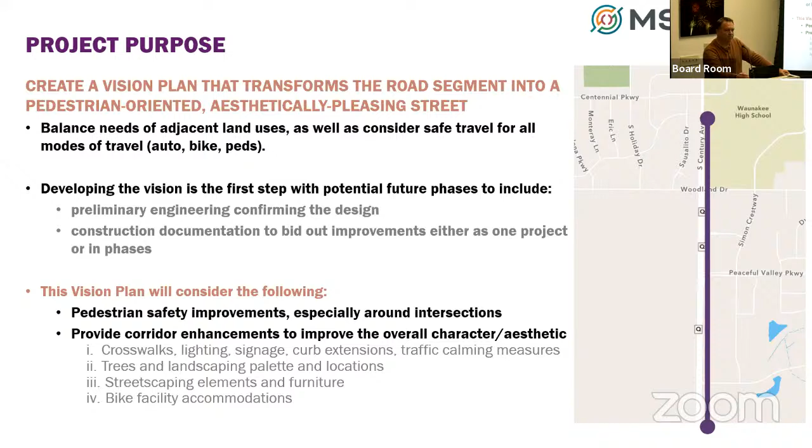I think it was already noted that we had discussions with staff. We've talked to landowners. A lot of comments were seeing a need for some improvements, especially with safety. There were questions about how you pay for it, and this was built before, but most agreed that some improvements are desperately needed in this corridor.

Traffic counts we just recently completed last Thursday. We're doing some calculations to determine the traffic counts. There are four segments we did, basically between each of the main streets all the way up to Centennial. So this week we'll have that information.

So tonight is about some of the ideas presented to landowners and staff, for direction on any modifications, or big no-nos if you see anything, to bring to the public. So the intent is to pick a date in early December to bring this as an open house to the public, and then come back here again for Plan Commission in January, and then ultimately to the board.

So there are four big ideas. I did provide some information in the packet. We'll go into a little more detail through this presentation, but: safer intersection crossings, increased comfortability for pedestrians and bikers, improved pedestrian connectivity, and beautification.

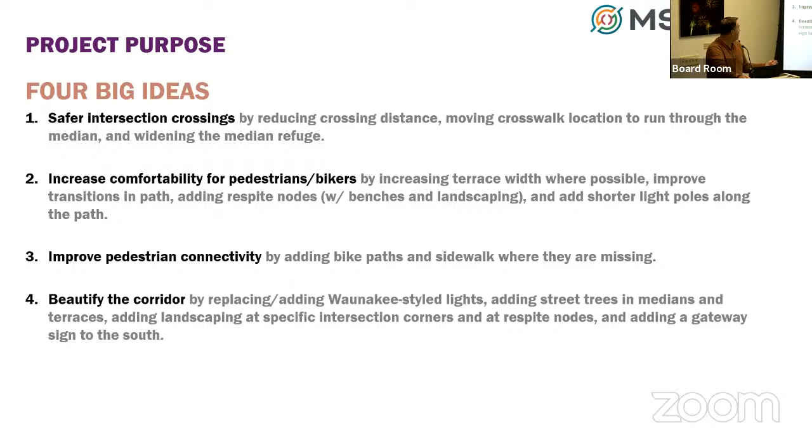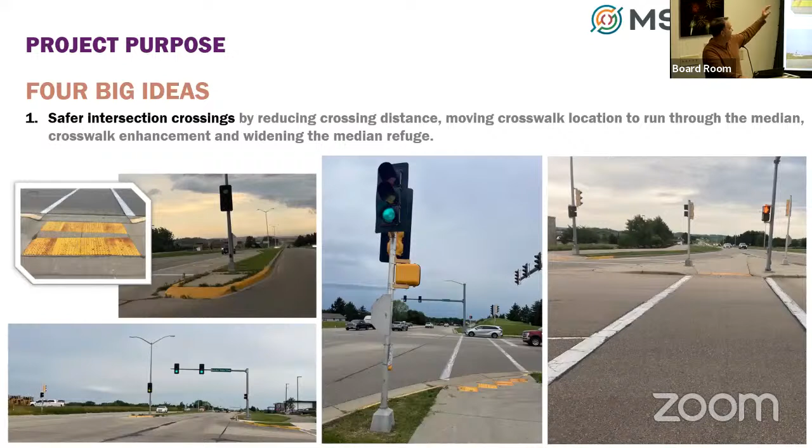These are examples. So I'm going to go from existing to big idea changes.

Yep. Yeah, your mic, Sue. Did you say the upper right-hand corner was East Washington? Correct. It'd be much easier if you could add the street corners if it's Madison, Waunakee on all these pictures, because I was really confused when I was looking at this. Okay, understood.

And we'll go section by section after the big ideas for the Waunakee vision. So these are images, not of Waunakee, but of opportunities for how we can improve it.

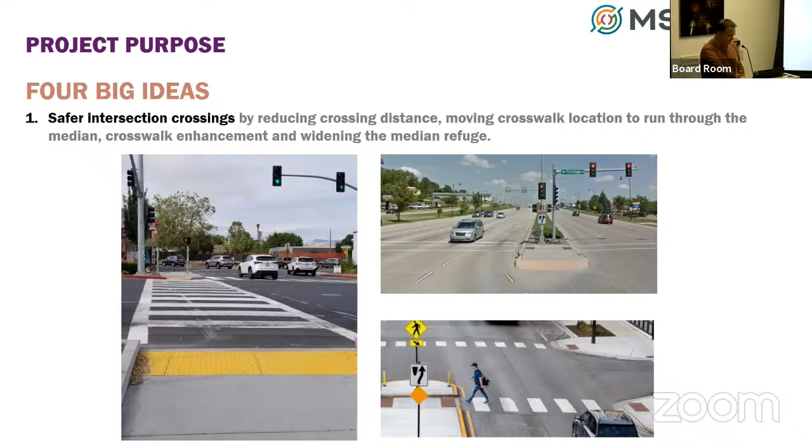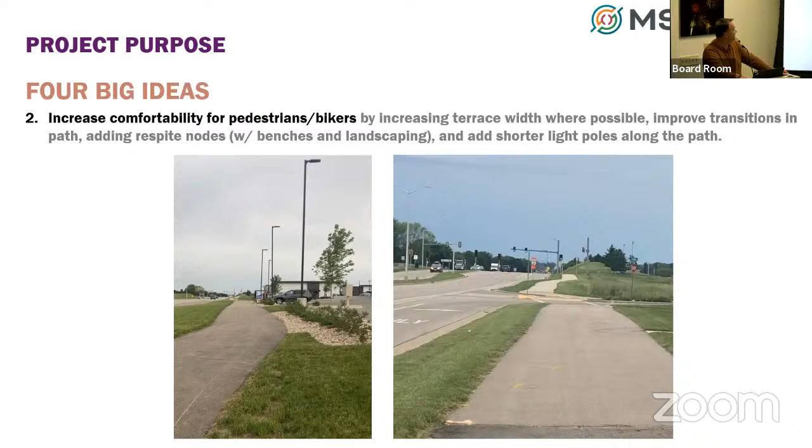See, these are Waunakee, that's Sarah Lane on the right there. Again, increasing comfortability for pedestrians and bikers. Right now there's minimal terrace, we call it, between the path and the curb in most cases, and there's definitely no places to stop, respite, benches, anything of that nature. So part of that discussion will be these images of what could be.

Looking at street lighting, there is no current lighting. If you go through there right now after this meeting, you'll see how dark it is beyond a little portion for the road where the median has lighting. There's no lights for the paths, and there are many schools here with people walking through, through fall, winter, and spring. So one of the considerations was to add lighting at a lower level along the bike path sections.

Then there's an option of a few locations that maybe benches and some additional landscaping might be nice, potentially a map in one location. The example here on the right is between Sarah Lane and Woodland. Currently, where the green is, that is where the path is—it was built closer to the road with very little terrace. What we're proposing, when that site redevelops, is considering moving that path basically 1 foot off of the right-of-way line to gain that additional comfort zone and terrace area that doesn't exist now.

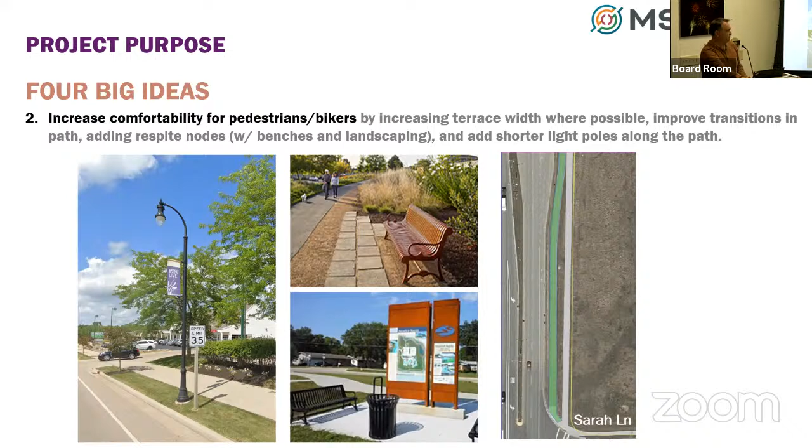Pedestrian connectivity—there are gaps in the corridor, notably between Centennial and Woodland on the west side. There is no path. There is the school path on the east side, but no path or sidewalk on the west side. Also currently, but planned for, is no path on the west side from Woodland down to Peaceful Valley. This would propose to have that path connect from Peaceful Valley all the way up to Centennial on that west side.

On the east side, we talked on the previous slide about the idea of changing where that location is between Sarah Lane and Woodland Drive to put it closer to the property line. But also, if we are going away from bike lanes on the road, it was even discussed with one of the developers that we should make it as safe and easy to maneuver for families on the bike path. So where number 2 is, where there is a hill, if you cut into it a little bit, you can more directly have that path connect from the intersection in the northeast corner over to the school path. Because otherwise you have to go across, do a direct right, and then do a direct left.

Notably in Peaceful Valley, there is no sidewalk or path on the south side, where the number 4 is. So there is an opportunity to go down to 1 lane in that portion. It already does go as you go east, it just doesn't start as a 1 lane. If you make that a 1 lane, you could have a decent terrace and still have a sidewalk there that doesn't exist now.

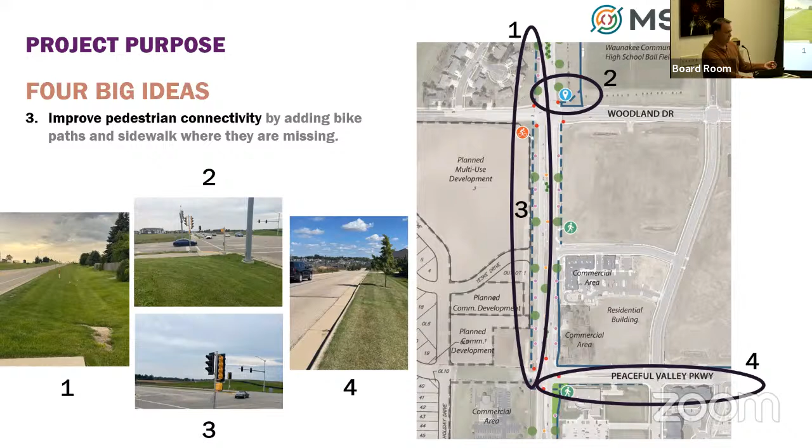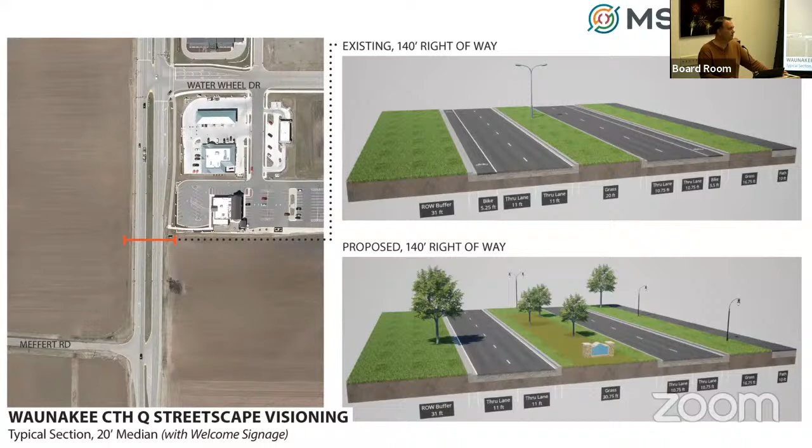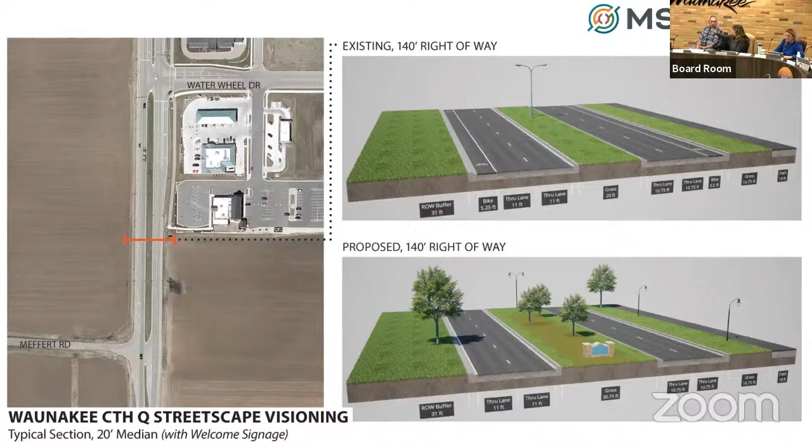Thank you. So is that median new? Are you proposing to put a whole new median in? I mean, the road was constructed... I don't understand what you're asking. Sorry, I was asking if the median strip is already there. This is all Waunakee, existing. Yeah, it is existing. So this doesn't change any of the existing access issues for the church and people on the other side? It does not.

And you're saying $400,000 to $500,000 for this whole project all the way to Centennial? For the median specific item. I think we probably want the whole cost. Yeah, the whole thing. And I'm kind of assuming based on Robert's comments that he would apply TIF to some of this, which he'd have to get support for, but there might be increment.

I like some of it, but I'd be very concerned about doing too much landscaping that obscures people's views, and about the cost of it. Bill will have to weigh in on that at some time.

Madison did these beautiful median strips up East Washington Avenue, and at the time I said, are you going to be able to afford to maintain them? Now they're concreting them over, or doing something totally different, all over the city, because they can't afford it. So I think we have to be careful where we put this, even though I love it and it's beautiful, I know it's infeasible to maintain over time. Trees are great, those are easier, but we should be careful.

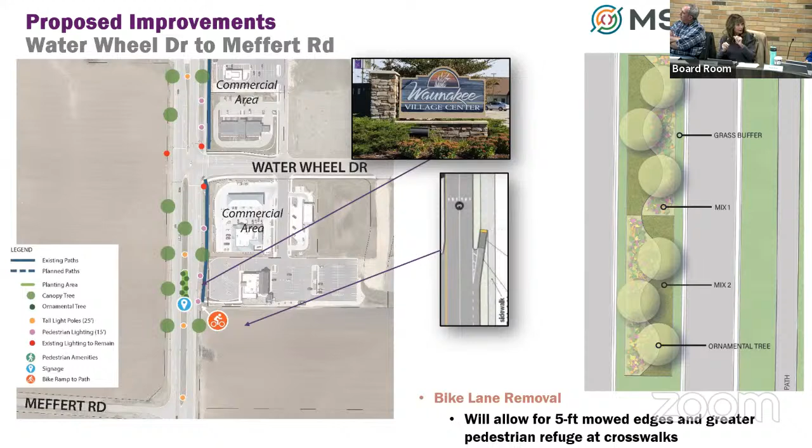The pedestrian stuff is really important. At certain intersections, marking crosswalks works well. I love the pedestrian flashing lights at certain spots, those work really well. I'd be concerned about going too far out into intersections because of snow and people being able to get around the corners. I've seen what Madison's done in some places, and I can't wait to see how they remove snow from there. I see cars going over the curbs, so you don't want to go out too far. It seems pretty reasonable, but I can't really tell for sure. There's a lot to study and a lot of input needed. I don't know how much pedestrian traffic we get in that area anyway.

When I look at what the uses are, I don't know, people walking along highways, and it is a highway. It will always be a highway. I think we have to recognize that.

I like the idea of improving the look going into Waunakee, but I was more concerned about Woodland into downtown, because I think that's so unattractive. I would love to see trees all the way down to Main Street and that looking more like our downtown. This area, I think, doesn't look bad.

So just some general, there's lots of comments to be made. And this is really the first we've looked at it. So, I mean, I think there's some viable things, but some other things to be considered. All right, thank you, Sue.

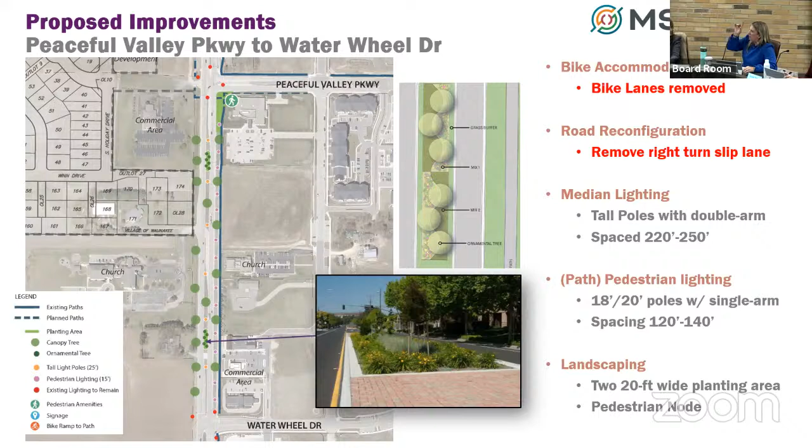Tricia? A couple things back to - sorry about that - turning this would be off of Centennial, making that a right turn only into the school at that intersection, on Centennial. The concern I have about doing that is that it just pushes more of the southbound traffic into other areas that are already very congested during school hours. So I don't know if maybe there's something to think about with that is where does that traffic go that otherwise would have come down from the south and gone into the school for drop off or pick up at that direction.

I don't hate the medians the way they are now. I see where it's going, but I think that improvement could be phased over time, or you know, some of the aesthetic improvements to what is existing right now.

And I think really increasing - I'd agree with you on whether it's the flashing lights and the white pavement - really at those three main intersections, would be Water Wheel, Peaceful Valley and Woodland. And then the bike, walking, pedestrian paths along both sides, taking traffic to those main intersections and just making those key crossing areas. On both sides, it already exists pretty much on the east side. And as it's developed, having something so that way you've got an option depending on where you're coming from or where you're heading.

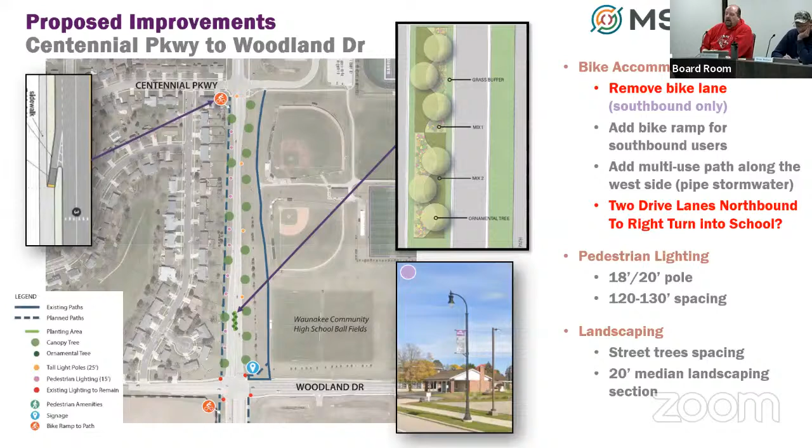Woodland and Peaceful Valley Parkway are kind of the two that I have the most concerns about. I would love to see the additional painting wherever it doesn't already exist - I think that's a really, really easy thing to take care of. I'm not sure about reworking some of those intersections. That right turn at Peaceful Valley Parkway, there's part of me that says yeah, there's probably some good value there, but again, I need to know what the cost of doing something like that is.

I guess that's kind of the end of my rambling. I'm not against this overall. I think as far as what you take to the public, take it all. There's nothing in here that strikes me as, yeah, that's off the table right from the start. All right, Brian.

Again, I would echo a lot of what Joe said.

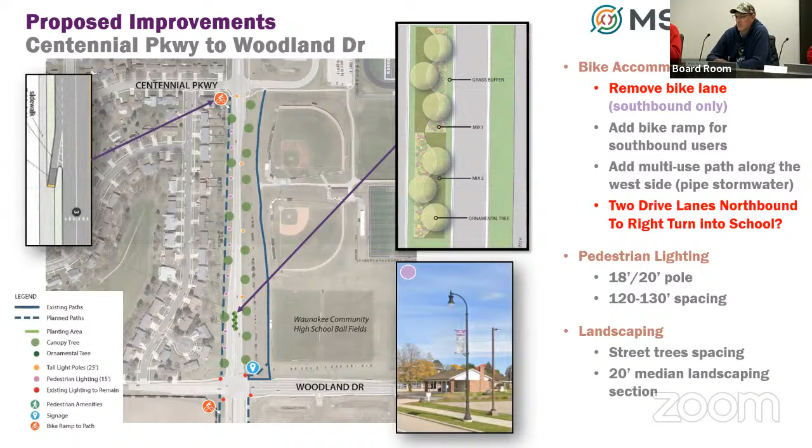Yeah, I think I said it before, I would focus the efforts. The trees along the corridor, I think, is an important aesthetic improvement. I'm assuming we can put trees in a 20-foot median. We don't need to be 30, but that might have some restrictions as they get older. I probably won't have to worry about that, but as far as the intersections, that's where I think we really need to focus our improvements.

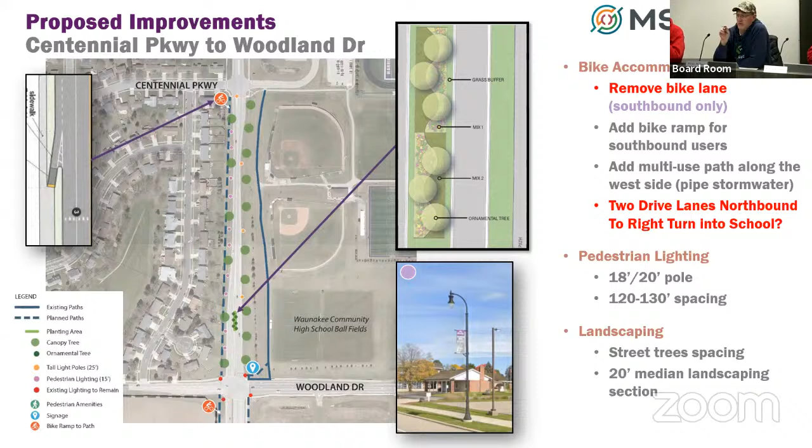If we're looking at that, even include Centennial because of the school access area. So you've got Centennial, Woodland, Peaceful Valley Parkway for now - how we can improve the intersections as they currently exist to improve pedestrian crossing, whether that means moving the crosswalks back, providing safer landings, bigger landings on the outsides. I don't know that I would do it by changing the medians over. Maybe it's something with the way the lighting is, longer time frames. You talked about not having the flashing beacon ones that we use in various spots with a great deal of success, but is there something out there that alerts drivers that this is a stop for pedestrians, not just a red light? I don't know what that might be, but improvement in those areas I think is important.

And then I could get behind the bike path or the pedestrian path, the multi-use path off the road a little further - I think I could get behind that. But as far as changing the existing layout of the road, I would be concerned about changing that too much from what it already is, because it is really about moving traffic by the time you get to this area heading out of town. It's about getting traffic out of the way, and if we tighten that up, it's going to have some impacts, especially if we continue to grow. Like I said, we've got one development that's going to add over 1,000 right now, and what's that going to be 5 years from now, 10 years from now?

And then as far as the lighting visibility - some decorative lights on the outside, I could get behind that. Those light poles are not cheap. If you go through and replace all these light poles, it's probably $1 million to replace all those light poles down that corridor. We've just spent the money to put the ones up, and they've got good visibility along the road. If you want to put additional lighting along the path, I could get behind that as well. But I would focus the energy on the intersections.

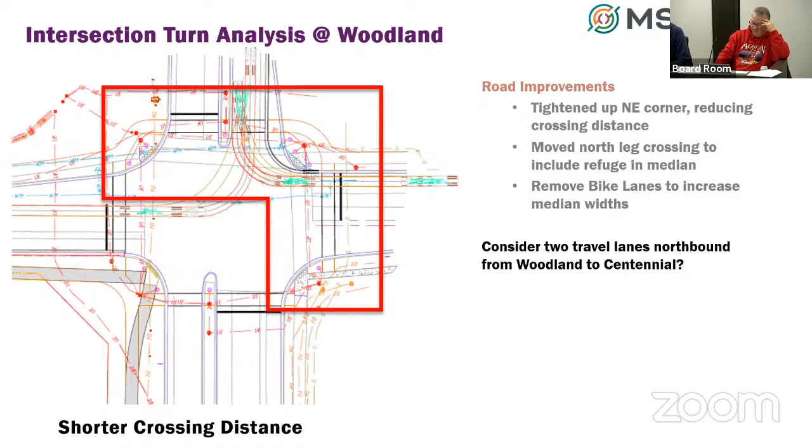So we talked about the slip lane versus the full change on that. Your engineers at your location say the slip lane actually slows traffic, or is meant to, but in your opinion it's not. So if we went to another engineering firm, what would their take be on that? You made it a little uncomfortable for me to follow whether it's a good thing or not a good thing. I'm just being honest.

Observation is one thing—that's probably the biggest factor, what is being observed. Lauren noted that people are passing through there quickly. You could model it, you could talk about good practice, but what is actually observed? I'd take that as the biggest response to that.

I do have a lot of observation since my place of work is right there. I see it often, and I'm there many times during the day, at rush hour, busy times versus slow times. I think people do drive too fast into certain areas, trying to get into the school zones.

To your point though, is that the right spot, where you're driving right into that school location?

When we set you on this job, we said provide us with a beautiful, pedestrian-friendly, all-in kind of plan for what we could do within what we thought our reasonable limits were. I really appreciate all the work you've done, the groundwork of talking to stakeholders ahead of time and vetting all the ideas.

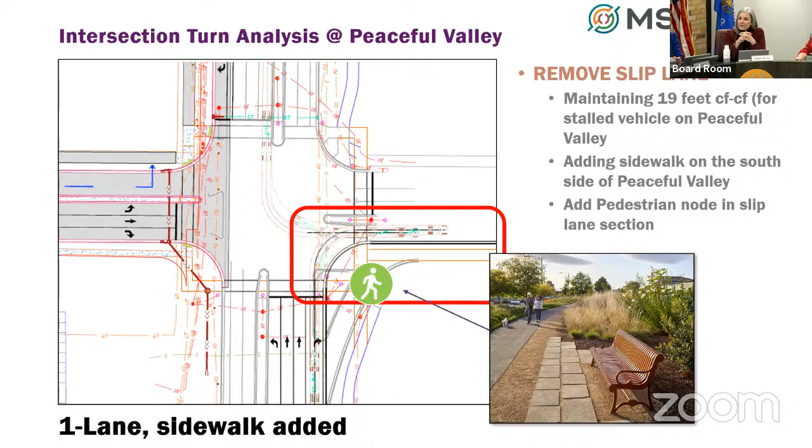Some other things I really liked about it: the idea of a map and some wayfinding we could put up in this area, from the top of the hill in Woodland down to the high school. I'm with you, Sue—I've always thought these are lost opportunities for really making the community beautiful. So the beautification of that area and softening it up, I think, are also really great ideas.

I'm really interested—I don't have a strong opinion one way or the other now, but I do know cost and practicality will be foremost in mind. I really like a lot of the ideas you presented today, and some of the low-hanging fruit, like painting the crosswalks and signalizing the non-signaled intersections, would be really great.

And Sue, you had a comment you were going to make. Is it possible for you to have budget information before you go to the public, and also a discussion at the board about potential phasing? Because there are priorities.

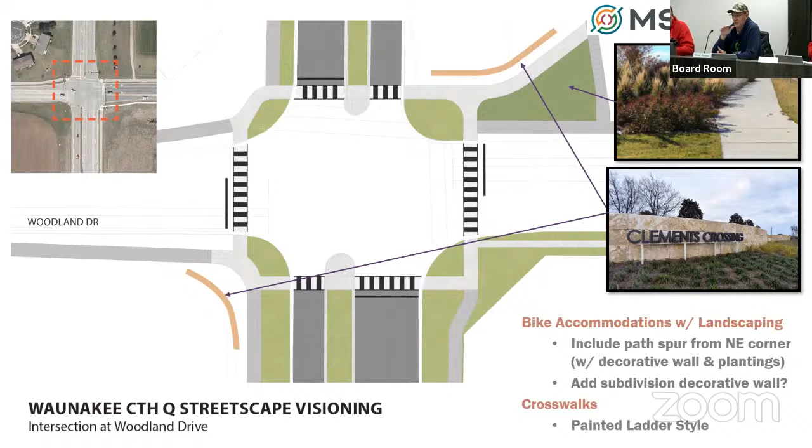I'm going to move to Madison.

Chris, last thing — I want to say to Mrs. Ziegler and her son Brian, who was my classmate, I don't want to move or change the sign that says 'Welcome to Waunakee.' Her husband was involved in that and it's very special to her as well as to the community, so I just want to clarify I'm not getting myself in trouble. That sign is why we're on the map — that's how everyone knows Waunakee, from that sign.

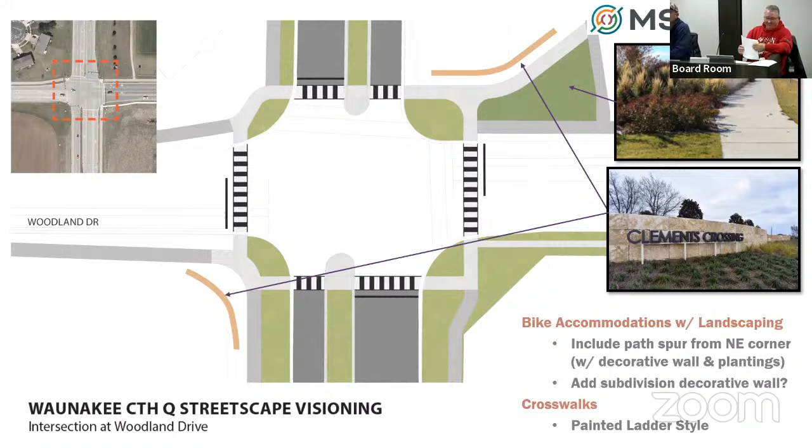Just so everyone's aware of the process, the schedule moving forward: tonight's point was to get your input on staff's first stab at what this could look like. Within the first couple weeks of December we'd have a public open house open to the community for their input. Then, once we have that input, we'd come up with a more refined plan to bring back to Plan Commission in January and then to the Village Board the week after.

Any other questions? I would just hope you could find a way to get information to the public other than just a public meeting, because people are so busy — parents with kids, sports, et cetera. The attendance is a fraction of what the population is, so if there's a way to get more information out, I'd hope we could do that.

Could we do a Zoom? I'm wondering about that — maybe we could talk about it. We can discuss it, though it would have to be at a staff level since it's outside the scope — we scoped and have a contract for an open house. But we could also talk to Kaylin about doing a video, or other options, like recording if at the open house certain concepts are being described, documenting that and putting it out on social media for feedback. Yeah, I think that's a great approach — we've done that a lot at work, just recorded our presentations.